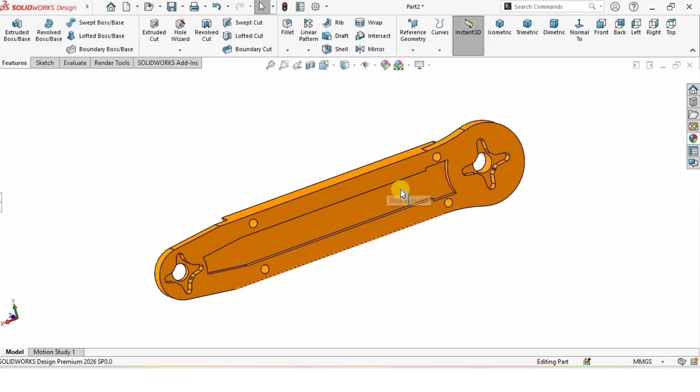So let's begin. Open a new part file, and in the display manager uncheck the floor reflection. Make sure that you're working in mmgs units. After that, select the front plane and click on sketch.

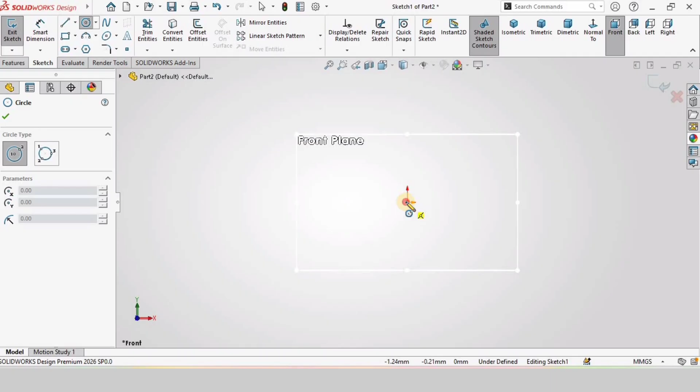Select a circle and create a circle at the origin, specifying the diameter as 18 millimeters. Now select a line and create a line that connects the circle, then create a reference center line. Make sure it's horizontal by assigning a horizontal relation.

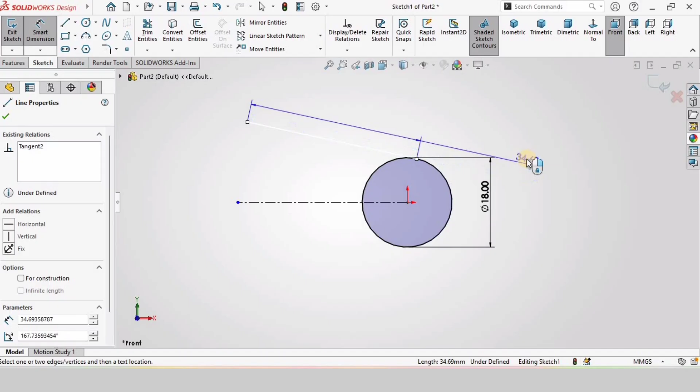Hold the control key, select the circle and the line, and make the relation tangent. Then specify the length of this line as 18 millimeters. Make sure you are assigning it this way. Then select this line and that line, with the angle between them being 7.5 degrees.

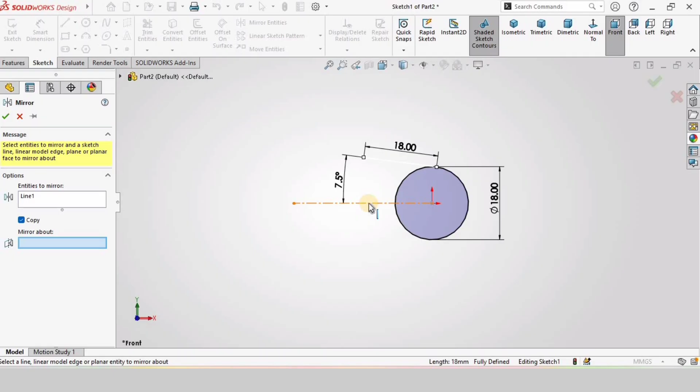Now I want the same line on the other side. For that I will mirror this line about the reference center line.

Now I will select the 3-point arc: first point, second point, and third point. The radius of this arc is going to be 21 millimeters, so specify that.

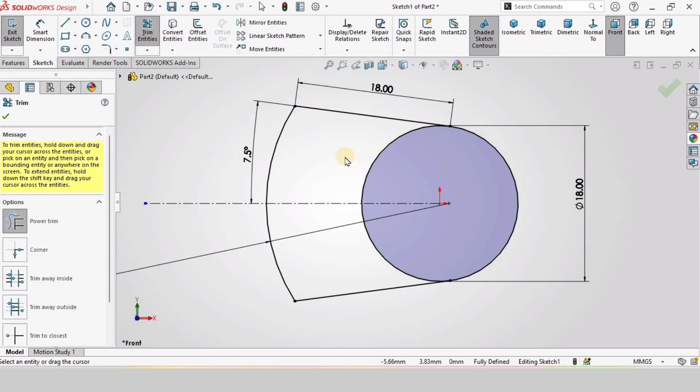After that I will select trim entities, making sure power trim is selected, and trim this area internally. Now the whole sketch has turned blue, which means it's ready for extrusion.

So select extruded boss base and specify the length of extrusion as 4 millimeters.

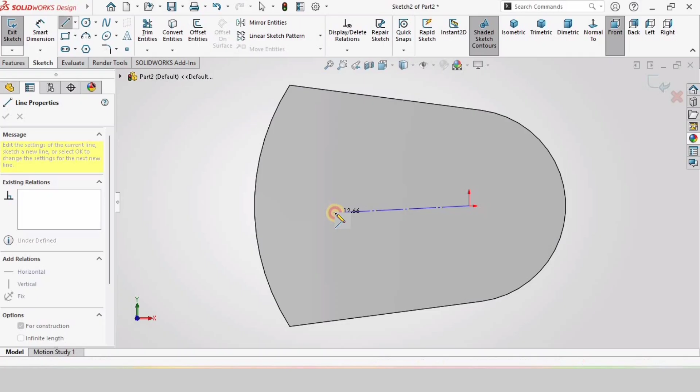After that, select this face and click on sketch. For reference, create a center line and make sure it's horizontal by selecting it and assigning a horizontal relation, then create a circle on top of it. Specify the diameter of the circle as 5 millimeters.

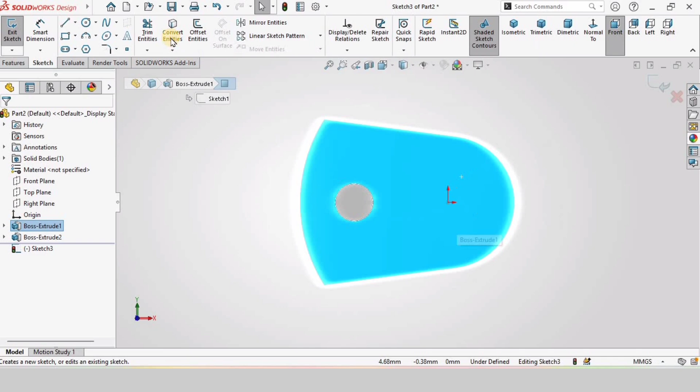Then go to features, select extruded boss base, and extrude it up to 3 millimeters. Now select this face and click on sketch again, and create a circle here. The diameter of this circle is going to be 17 millimeters.

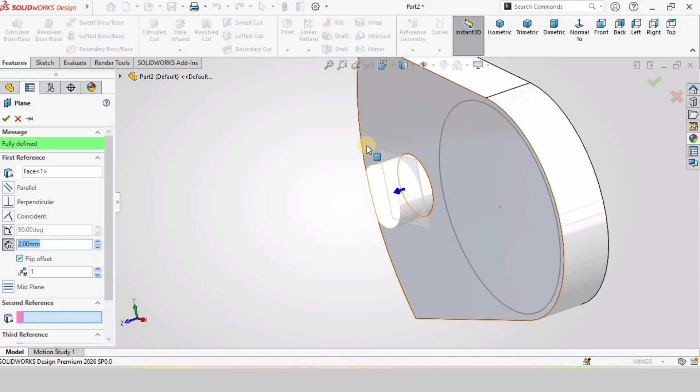Now exit the sketch, and we require a plane. So in features and reference geometry, select plane, then select the top of this pin. Specify 2 millimeters, check the flip offset box, and then confirm. Now a plane is created.

Select this plane that we just created and click on sketch. Create a circle at the origin, with the diameter of this circle being 9 millimeters.

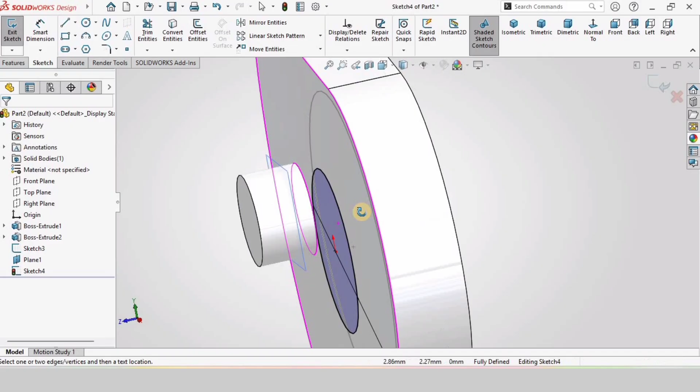Now let me show you the gap between these two sketches. We require this gap because we want the lofted boss base.

So exit the sketch and select lofted boss base in the features. In this window, first clear it, then select this sketch and this sketch, basically the two circles, and check the box. A loft has been created, as you can see here.

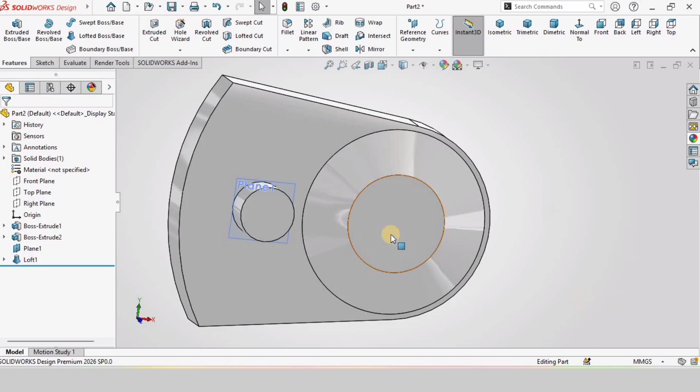Now select the top of this face and click on sketch. Create a circle of diameter 6 millimeters, and I want to cut it, so I will select extruded cut, specify through all, and check the box.

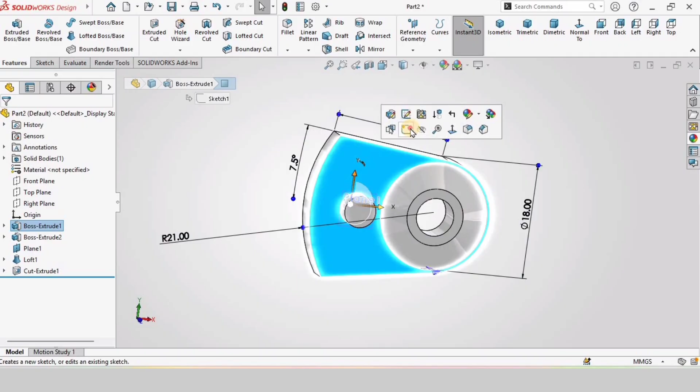Now I will select this face and click on sketch. For reference I want a horizontal straight center line, so I select this line and make the relation horizontal.

After that I will select the corner rectangle, creating it from this point to this point. Specify the length of this line as 90 millimeters.

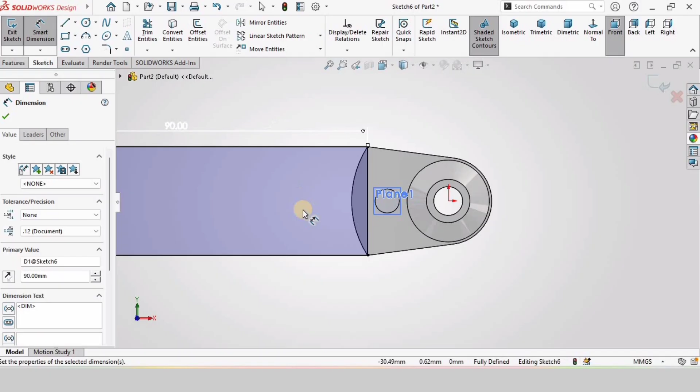Okay, now go to features, select extruded boss base, and in the opposite direction I will select this option, 4 millimeter the length of extrusion, and check the box. Now we have the loft on this side, so let me hide the plane that we have created.

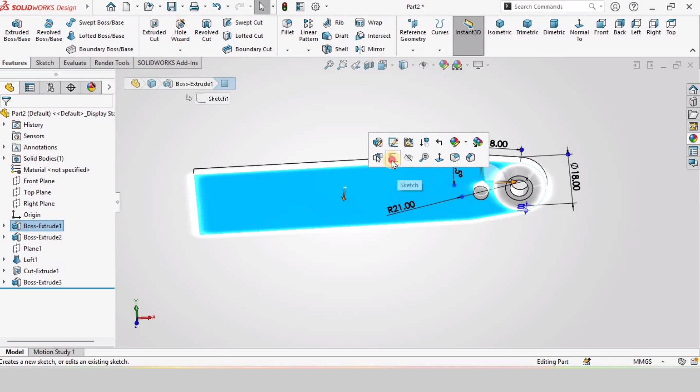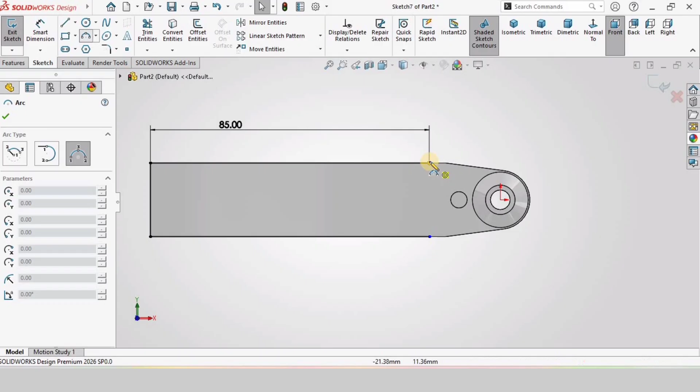On the left side, create a sketch on the surface and create a corner rectangle here, and specify the length of this line as 85 millimeters. After specifying this, I will trim this line because I want a 3-point arc here. So select a 3-point arc and create an arc like this, and specify the radius of this arc as 25.34 millimeters.

Now I will go to features and select extruded boss base, and extrude it up to 5 millimeters, then check the box.

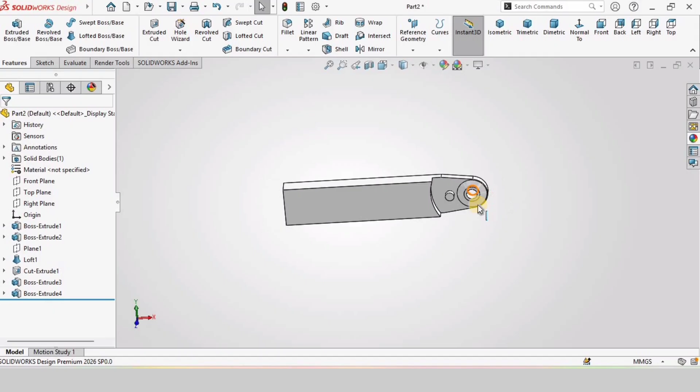Now we have the slope here, but on the flat surface select the face and click on sketch. First I would require a horizontal straight center line from this midpoint to this origin point. Then I will create a corner rectangle which should be symmetrical about the center line.

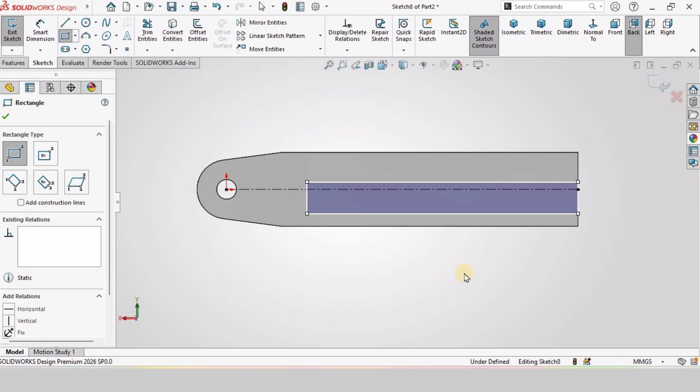As you can see, this is not the case right now, so hold Ctrl key, select these three lines and make relation symmetric from here. Now this is symmetric about the center line.

Now I will specify the distance between these two lines as 5 millimeters, and the length of this line as 83.58 millimeters.

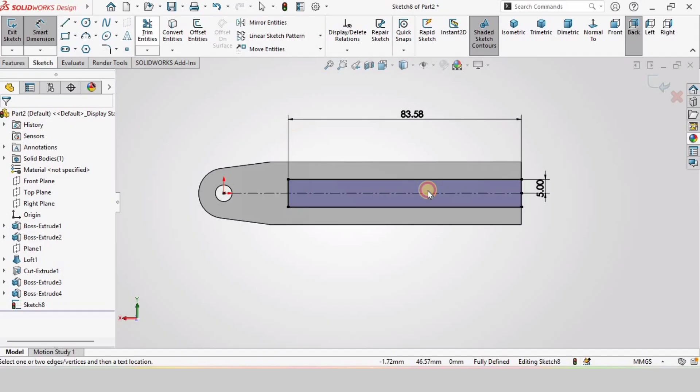Now I will trim this line, this line, and this line, and this line as well.

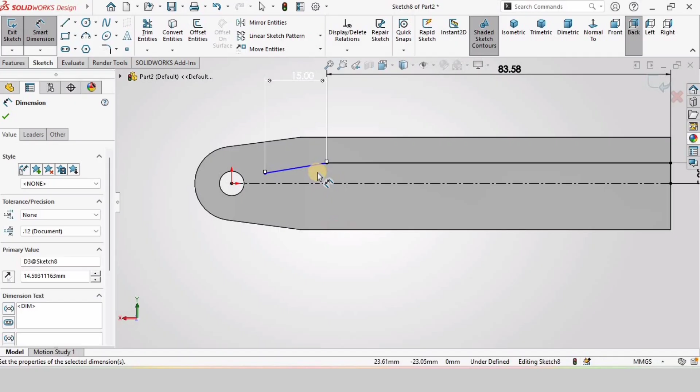Now I will select the line tool, and from this point downward I will create a line in slope. Then I will specify the horizontal distance of this line as 15 millimeters. Then I will select this line, and I will specify the angle between these two lines as 172.5 degrees.

Now I will mirror this on the other side, so I will select the mirror entities. In the upper window I will select these three lines, and in the lower window, which is mirror about, I will select this reference center line.

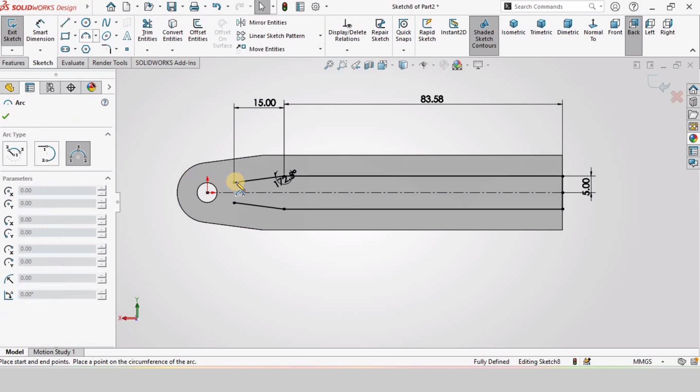Now I would require an arc, so I will select 3-point arc, select these 2 points and this third point in space. The radius is 9.55.

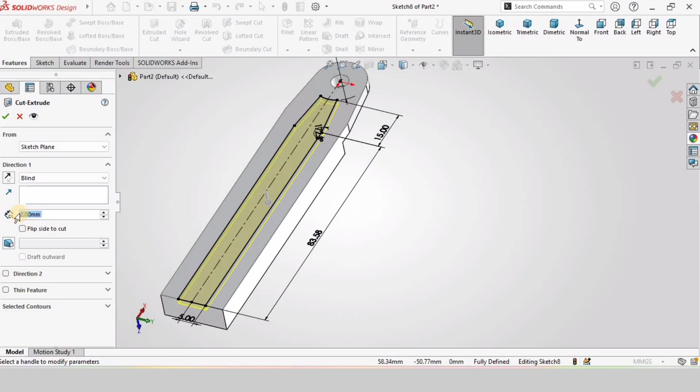Fully defined sketch. Now I will go to features and select extrude cut, and I will cut this 2 millimeters. Select the blind 2 millimeters and check the box.

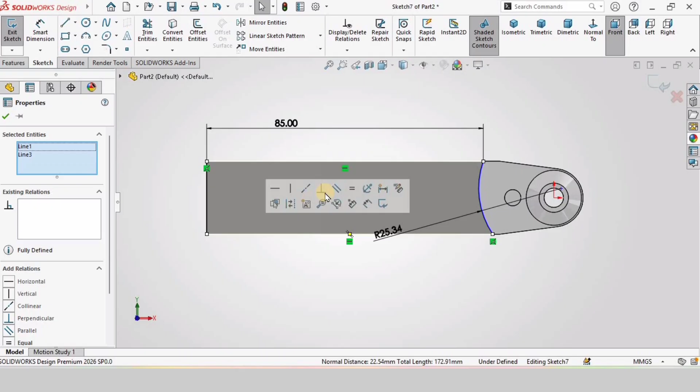Now on the back side I think this is an error, so let me select this side and click on edit sketch. So, this line, hold the Ctrl key, select this line and make relation equal either from here or from the other side. Now this is correct. If I simply exit the sketch, now this is correct.

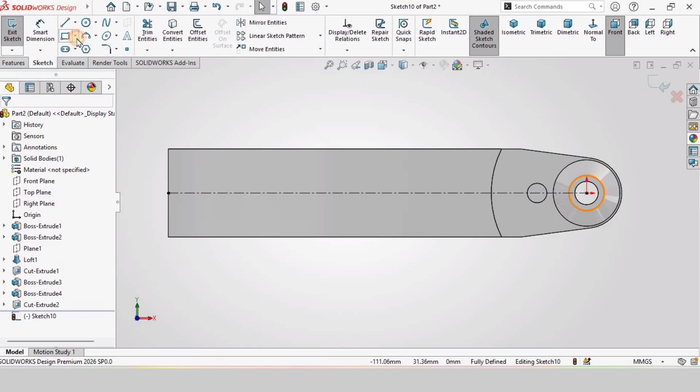Now on the same side where we have the slope, select this face and click on sketch. And I would require a reference center line. Then I will create a corner rectangle.

I will make sure that this is symmetric, so I will hold Ctrl key, select these three lines and make relation symmetric from here. Specify the length of this line as 10 millimeters.

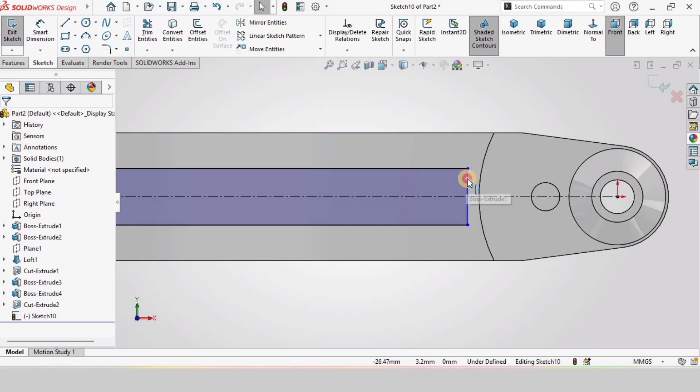Now I will delete this line, drag this line up to this arc, drag this line up to this arc. Now in order to complete the sketch, I will make this 3-point arc exactly on this previous arc like this. If not, you can either take help from the convert entities of the arc and then cut it up to 2 millimeters downward.

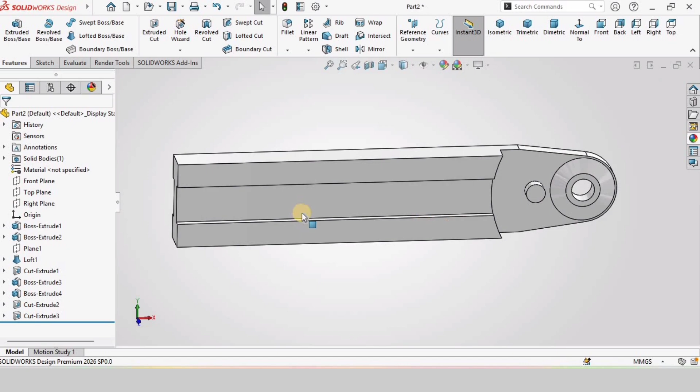So now I will create a fillet of 2 millimeter radius. Select these two inner edges and specify 2 millimeter the radius and then check the box.